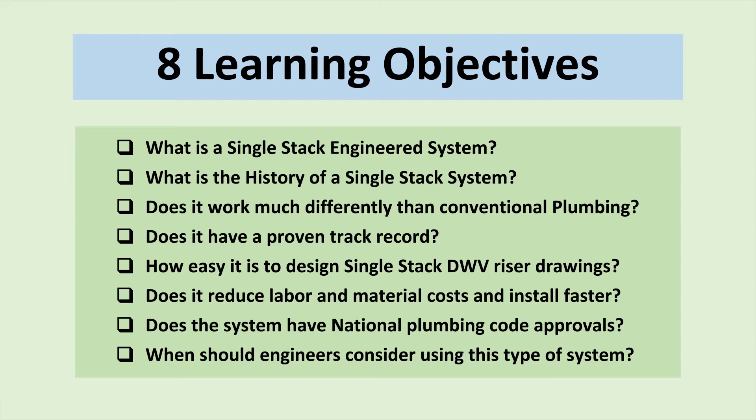What is a single-stack engineered system? The history of single-stack systems. Does it work much differently than conventional plumbing? Does it have a proven track record? How simple is it to design single-stack DWV riser drawings? Does it reduce labor and material costs and install faster? Does the system have National Plumbing Code approvals? When should engineers consider using this type of system? This is the most important thing for a plumbing engineer to consider after receiving the questions and answers found in this presentation: the plumbing engineer is the only professional according to the Plumbing Code that can design and stamp the approval of a single-stack system.

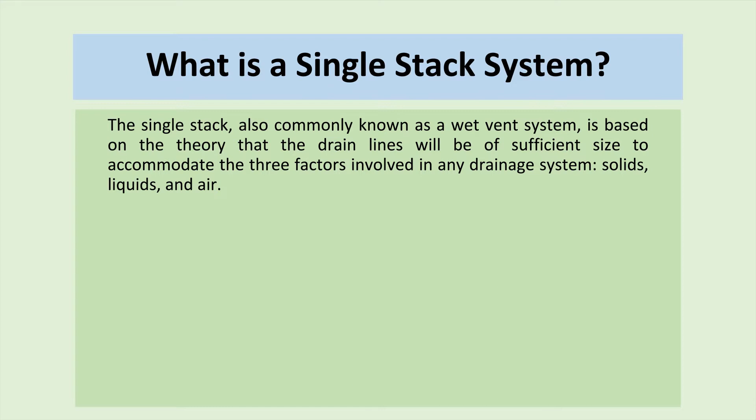What is a single-stack system? The single-stack, also commonly known as a wet vent system, is based on the theory that the drain lines will be of sufficient size to accommodate the 3 factors involved in any drainage system: solids, liquids, and air.

In the city of Philadelphia, a single-stack system was developed using these principles. The Philadelphia single-stack plumbing system does not require, nor does it depend on, any special type of drainage or vent fittings. However, there are branch line developed length limitations, and the size of the stack is often too large to fit in common plumbing walls.

The engineered single-stack system we will discuss today uses 2 fittings to control the velocity of water in the vertical stack and reduce the hydraulic jump when the piping changes from vertical to horizontal. There is also a single-stack system listed in the IPC code that uses long sweep or combo type fittings used in smaller multi-story buildings. Also, there is an approved combination waste and vent method shown in IPC section 912.

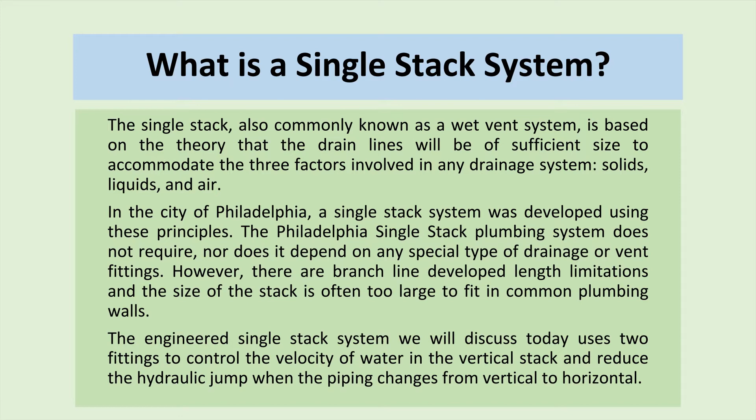The history of single-stack plumbing: the single-stack system is an engineered drainage and vent concept for multi-story buildings of any height. It involves 2 primary fittings, the aerator or stack vent and de-aerator or base vent, in conjunction with the normal approved standard DWV pipe and fitting materials.

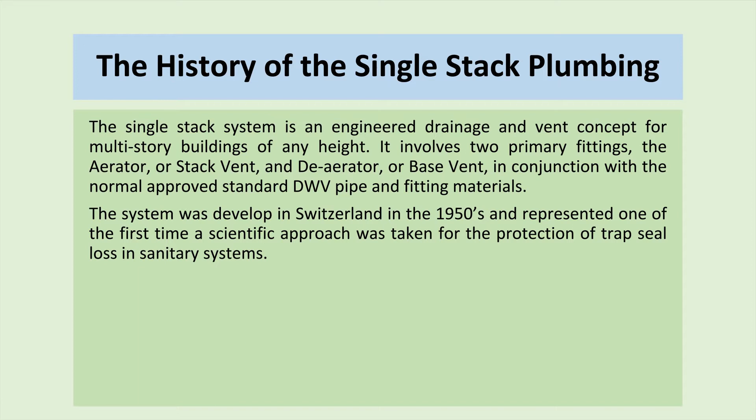The system was developed in Switzerland in the 1950s and represented one of the first times a scientific approach was taken for the protection of trap seal loss in sanitary systems. The hydraulic and pneumatic characteristics of intermittent flow were studied using a 10-story testing tower, complete with measuring instruments. It was found that controlled flow velocities reduced the excessive pressure excursions that can occur in conventional systems without revents.

The unique interior of these 2 engineered fittings provides the control and will maintain internal pressures acceptable without using any revents. These 2 special vent fittings are the most popular single-stack systems used in Europe, the United States, and Canada. They provide both venting of the wastewater flow for both the vertical stack and the horizontal drains.

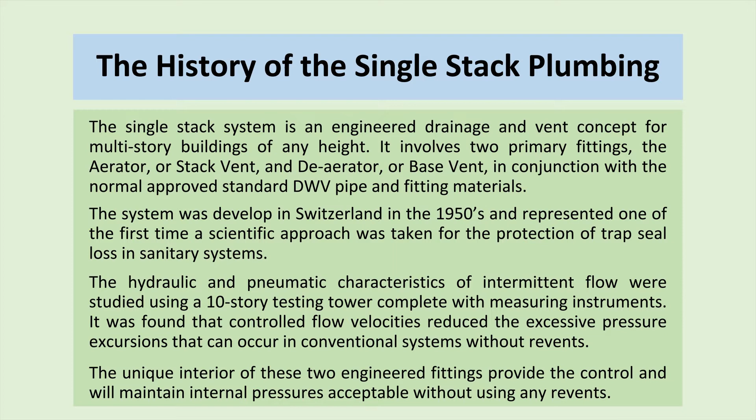Different single-stack systems installations. Single-stack technology was developed by Fritz Sommers in Switzerland in the 1950s.

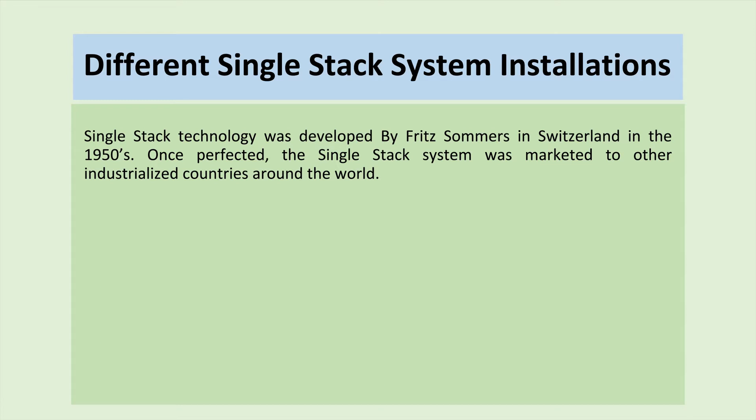Once perfected, the single-stack system was marketed to other industrialized countries around the world. Developed initially in cast iron, single-stack was introduced to the United States in the mid-1960s in the form of DWV copper. In the 1970s, a no-hub cast iron version was developed that offered standard no-hub band connections and became successful in hotels and high-rise apartment buildings.

In 2008, a single-stack fitting was developed using PVC materials, allowing use of the system for mid-rise residential, wood-constructed hotels, and high-rise towers, replacing both the heavy and expensive cast iron piping.

Europe and Asia started installing high-density polyethylene single-stack systems. Geberit is a Swiss company that uses similar type fittings, only made with polyethylene fittings and piping for projects in Europe and Asia, but they require electronic welded joints and the HD polyethylene material, and this is not approved to use in the United States.

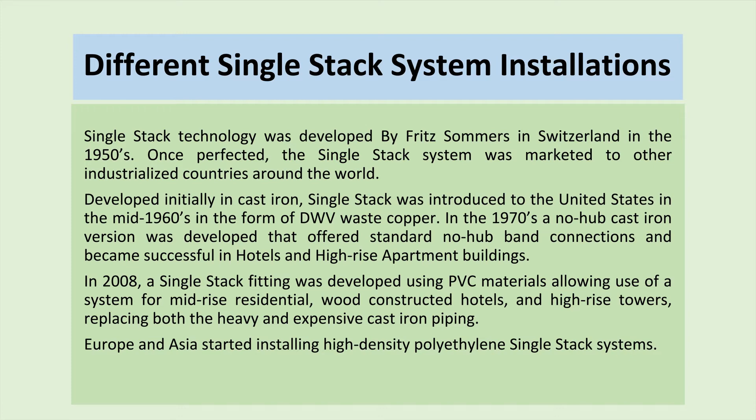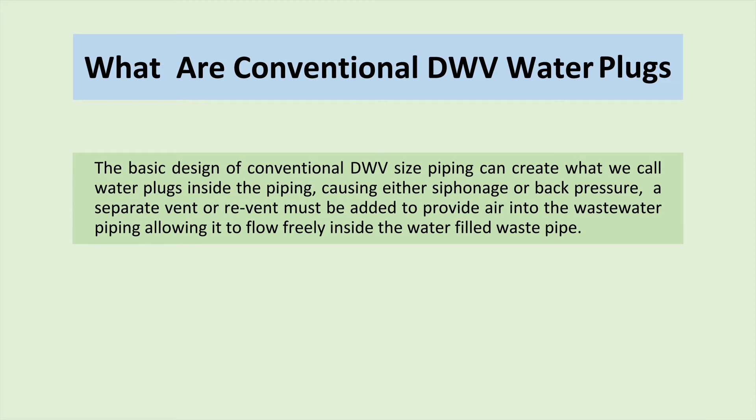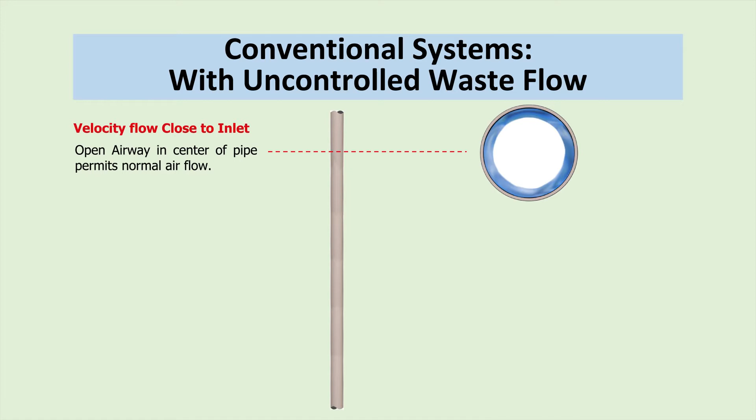Velocity increases with vertical drop. The increase in water flow velocity causes the thickness of water flow to build up. At terminal velocity, the air opening is completely closed, forming a water plug. This causes siphonage or back pressure unless the branches are separately revented.

These water plugs can form in conventional plumbing inside the horizontal DWV piping, but can be unplugged by installing an additional inline vent to provide air, allowing a full pipe to easily flow without affecting any trap seal losses.

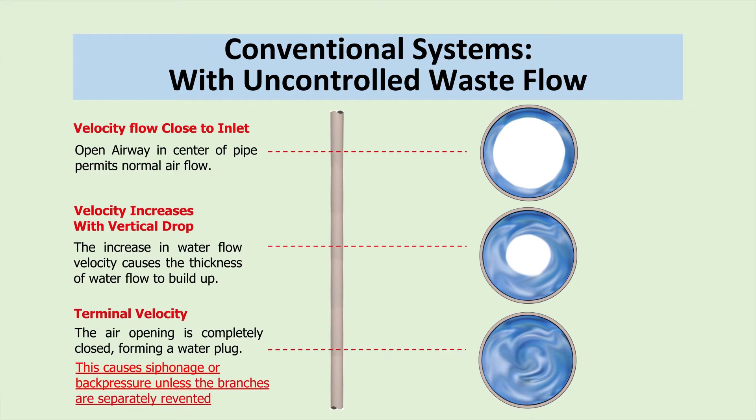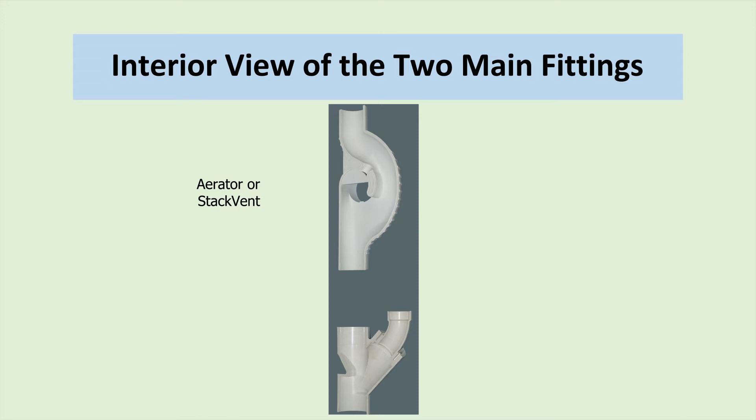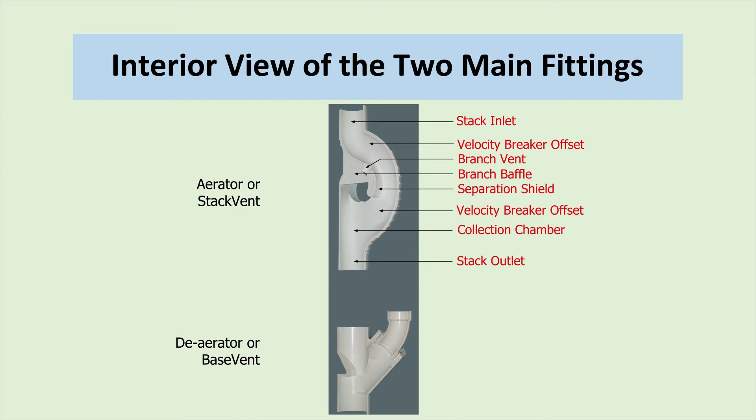Interior view of the two main fittings. The aerator or stack vent has a stack inlet, velocity breaker offset, branch vent, branch baffle, separation shield, velocity breaker offset, collection chamber, and stack outlet. On the de-aerator or base vent, there is an inlet, a relief vent that controls back pressure, a nose baffle that controls velocity, and an outlet.

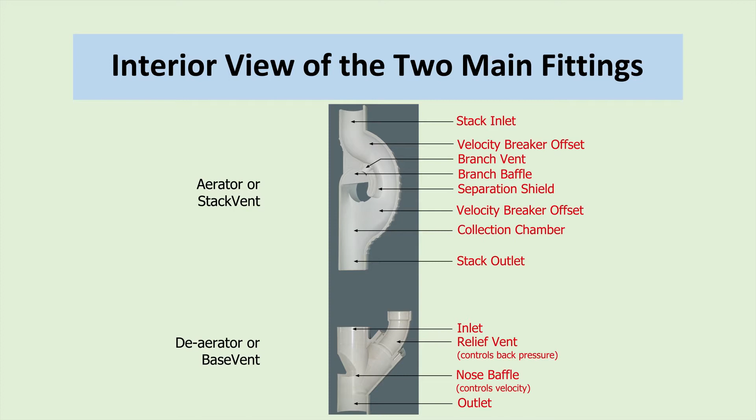These are the two special vent fittings used by ProVent PVC and Sovent cast iron. The engineer's design and pipe sizing allow the system to properly vent all the vertical and horizontal piping, and to control waste flow velocities.

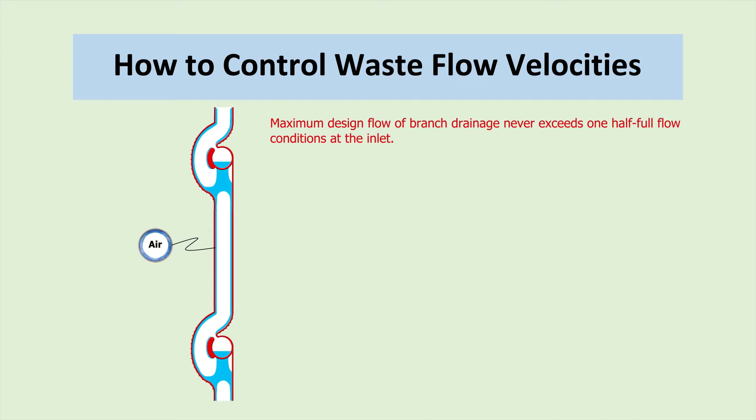Here's a stack with a stack fitting showing air in the middle. Maximum design flow of branch drainage never exceeds half full flow conditions at the inlet. The stack length never exceeds 20 feet without either a stack fitting or a velocity breaker using an inline offset fitting.

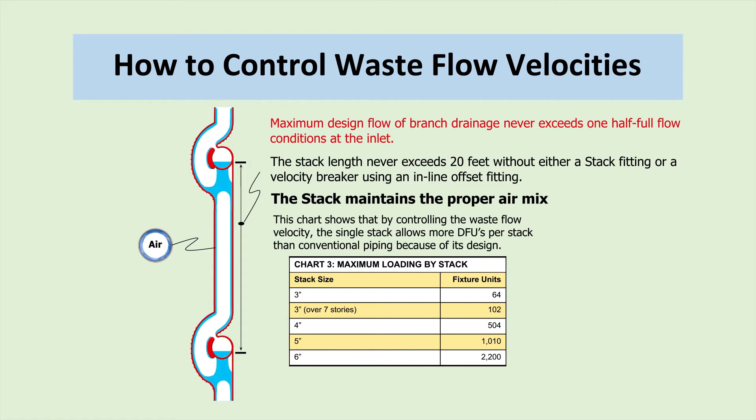The 4-inch allows 504 fixture units. The 5-inch is 1,010. A stack fitting is required at every floor when the connecting branch piping is 2.5 inches or larger in diameter.

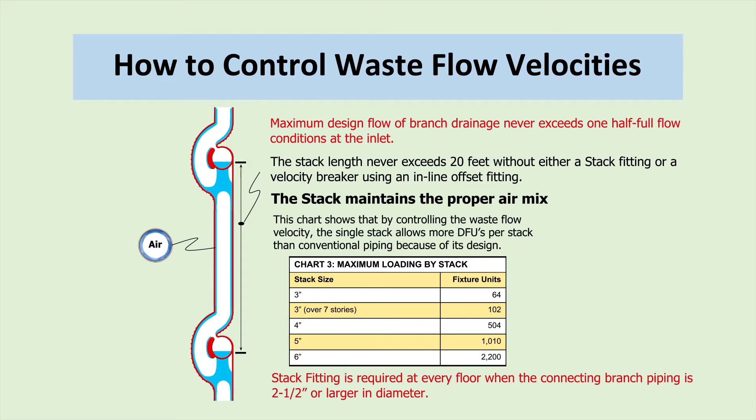IPC and UPC single stack DWV approved design.

IPC and UPC has an approved single stack system providing a similar type of combination waste and vent system which allows a single stack with many limitations. It allows just wastewater to flow through this straight stack. This approved system is still used now in many apartment buildings, but notice all the piping limitations.

It's a straight stack and cannot have any offsets and cannot discharge water closets, urinals, or disposals. There are no offsets permitted, and it has to be sized uniformly throughout its length.

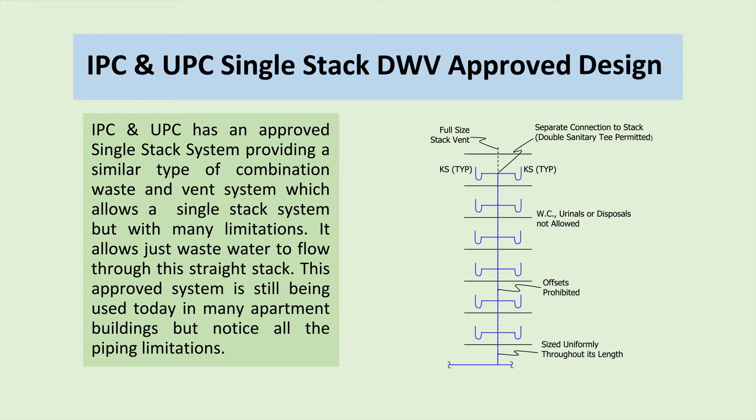This shows the IPC Section 912 Combo Drain and Vent System. This system permits waste-only fixtures to discharge into the IPC Combination Waste and Vent Stack System 912 without using revents, but has many restrictions. If the stack vent fitting was used, this system would have only a few restrictions.

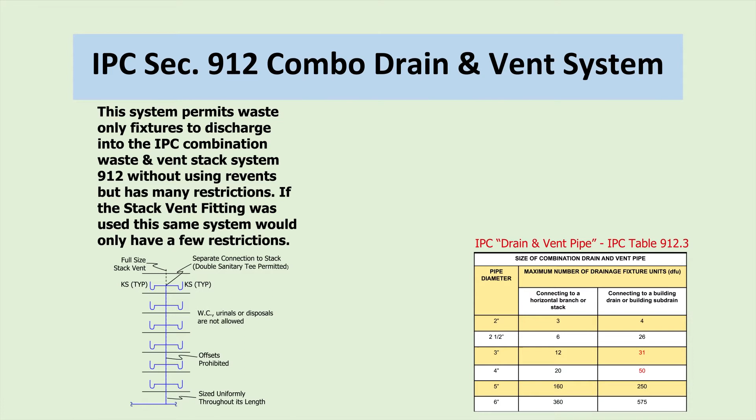The IPC Table 912.3 shows the 3-inch single stack connection limited to 12 fixture units, and the 4-inch stack is limited to 20 fixture units.

Compare this when using a stack vent fitting at each floor. Chart 3, loading by the stack, shows 64 fixture units for a 3-inch stack and 102 fixture units in apartment buildings over 7 stories, and 504 fixture units for a 4-inch stack and 2,200 fixture units for a 6-inch stack.

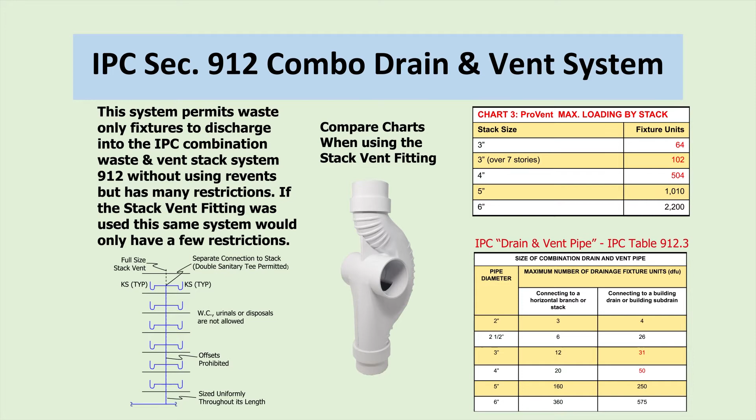As you can see, the approved IPC drain and vent system with limitations is basically the same design as the single stack system. The only difference is the single stack method adds a stack fitting at every floor and a base fitting where the vertical stack goes from vertical to horizontal with only fixture unit limitations.

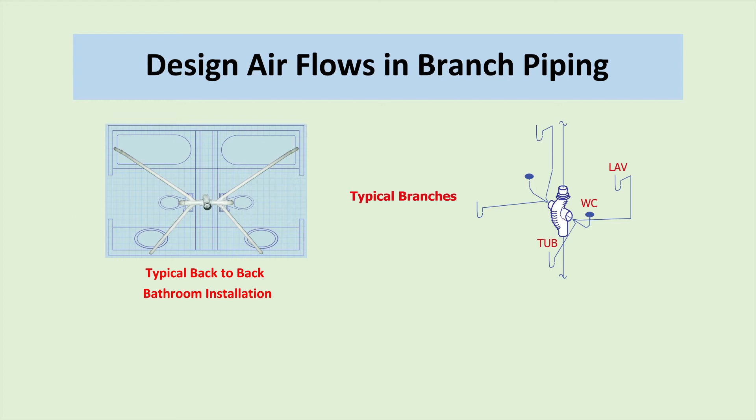The single stack uses only design airflows in branch piping. Here, we are showing a typical back-to-back installation. Typical branches are coming from the stack fitting to 2 water closets, 2 tubs, and 2 lavatories.

The single stack design flow is less than 50% of capacity. Single stack allows the waste to be vented through the top of the branch piping.

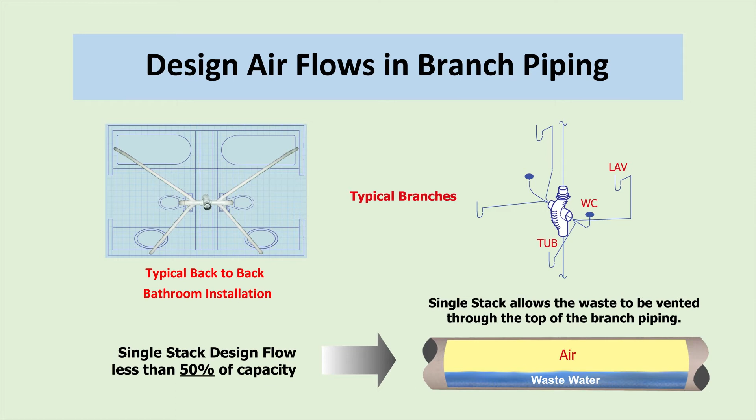The ProVent design can also be compared to the IPC and UPC code-approved circuit venting that allows the air on top of horizontal pipe, shown here, to be used as a vent for branch connections. IPC and UPC allows for circuit venting.

Circuit venting allows up to 8 floor outlet fixtures with a single vent. The basic IPC principle behind a circuit venting system is the horizontal flow of the drainage never exceeds half-flow water conditions inside the pipe.

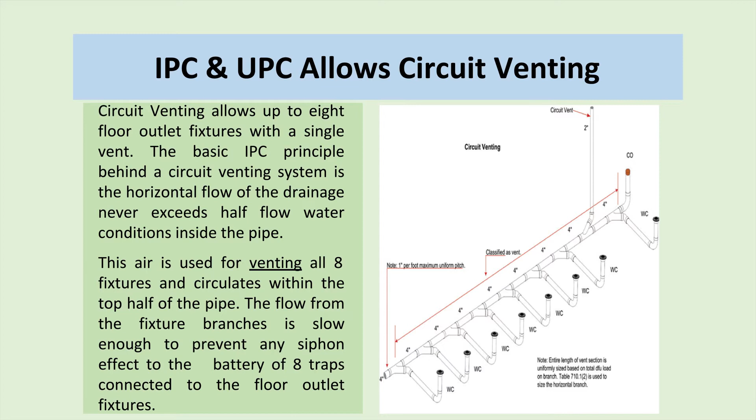This approved IPC Section 7.101 and UPC Section 911.1 circuit venting also justifies the same single stack method of venting the branch connections. This shows multiple branches into one branch opening.

The single-stack system functions on the same principle by using the air circulating inside the top of the horizontal branches to allow a combination of horizontal drains to drain into one single branch, as long as the one 3-inch branch doesn't go over 13 DFUs.

IPC Table 710.1(2) shows 20 DFUs can discharge into one vented branch opening. Both methods will drain the same way, only the single stack can drain more than one branch, but not more than 13 DFUs.

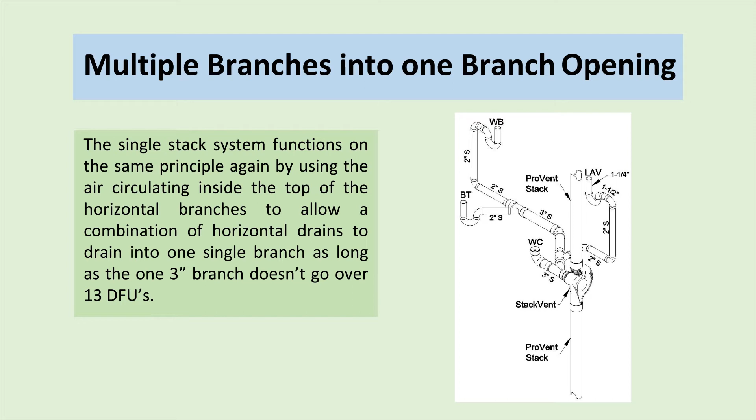The single stack base and PRL fitting. Because of the hydraulic jump at the base of every stack, the pressure relief line shall not be tied into the horizontal drain any closer to the stack than 10 times the drain diameter.

This is measured from the center line of the stack to the center line of the PRL wye connection. Tying the PRL into a 4-inch drain would require at least 40 inches from the center line to the stack. The de-aerator or base vent fitting will reduce the hydraulic jump, providing a smooth flow into the main drain.

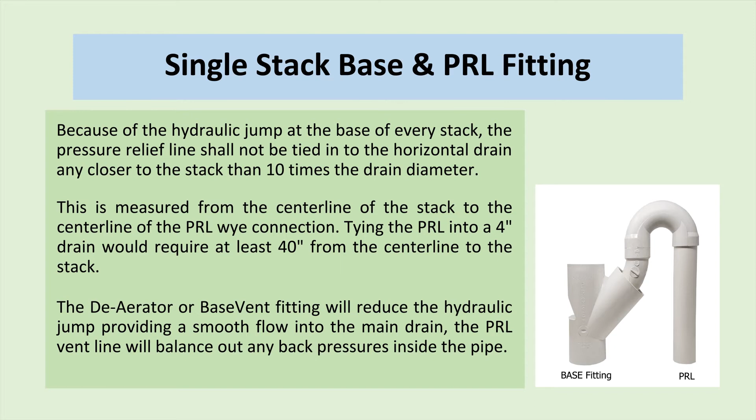The PRL vent line will balance out any back pressures inside the pipe. This same base or de-aerator fitting is also used for venting when stack offsets are needed when bathrooms are moved to a different area from the floor below. The base fitting controls the flow and hydraulic jump.

This detail shows how and where the PRL vent line gets tied in above the elevation of the main drain, compensating for any negative or positive pressures inside the drain. The nose baffle compensates for back pressure and lowers the hydraulic jump. The stack and the vent are in the same wall.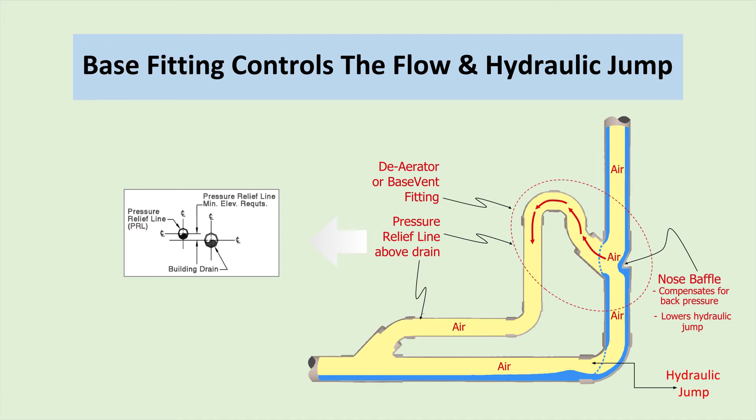Connecting the horizontal branch drains. Branch waste lines must enter above the center line within the 10 times stack diameter. Branch waste lines connect anywhere upstream from the PRL line and connect with the branches rolled up as shown here.

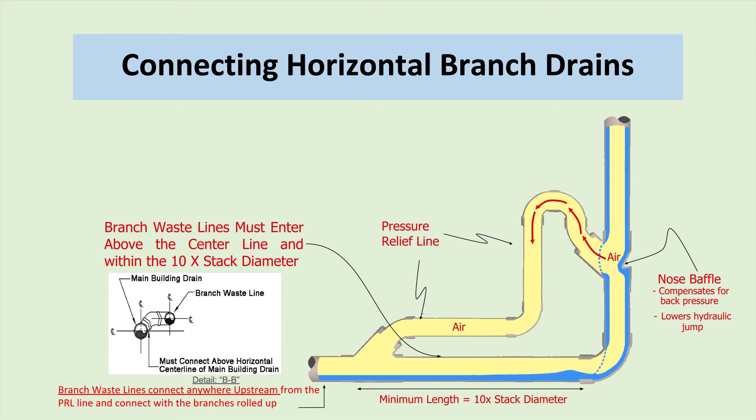The base fitting using roll-up branches. Here, we are using the branch drains rolled up when discharging into the main drain. See the branch detail showing the wastewater in the branch discharging into the open airspace on top of the main drain, producing a smooth flow. The detail on the right can be used in the underground or in the collection area above the ground floor.

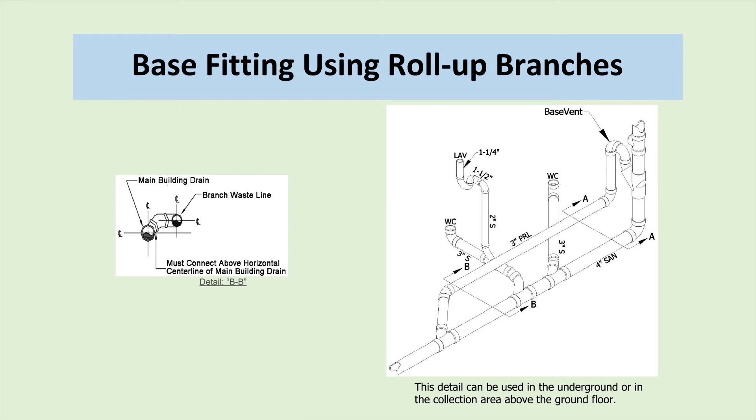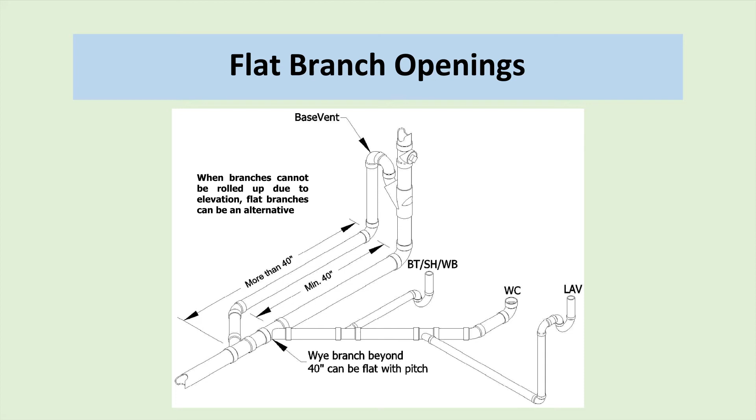Flat branch openings. When branches cannot be rolled up due to elevation, flat branches can be an alternative. However, they can only be tied in 40 inches beyond the stack itself and can be laid flat, but with pitch to the 3 branches shown here.

Stack offset piping connections. When offsets occur on the upper floors, the PRL vent line must connect into the vertical stack and not into the horizontal piping. If the stack offset can be made with a minimum 60-degree fitting or less, they are not considered an offset, but considered a straight stack, which is shown here on the right.

On the left, it shows the tying in of the PRL line on the vertical stack as opposed to the horizontal. The branch lines still have to be rolled up as shown here.

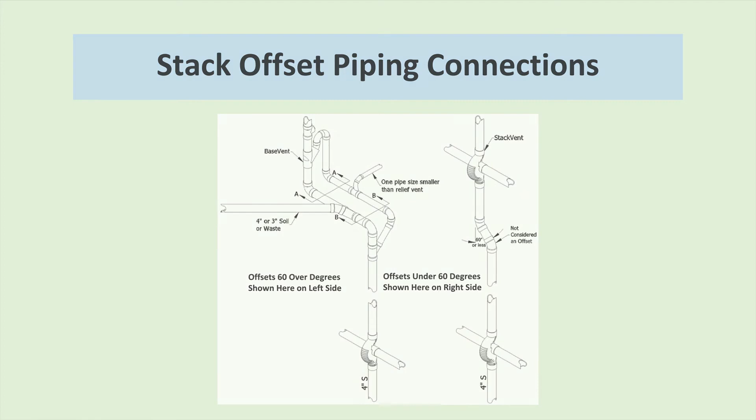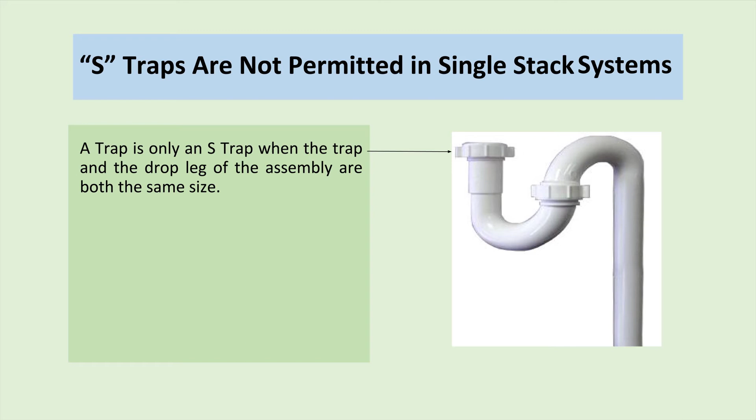When most people see lavs and sink connections, they say, 'Hey, that's an S-trap.' S-traps are not permitted in modern plumbing codes. They used to be permitted years ago, but have since been outlawed. S-traps are not permitted in single-stack systems. A trap is only an S-trap when the trap and the drop leg of the assembly are both the same size. The drop leg fills up with water, causing a water plug that can siphon the water seal in the trap. Single stack designs do not allow this type of siphonage S-trap.

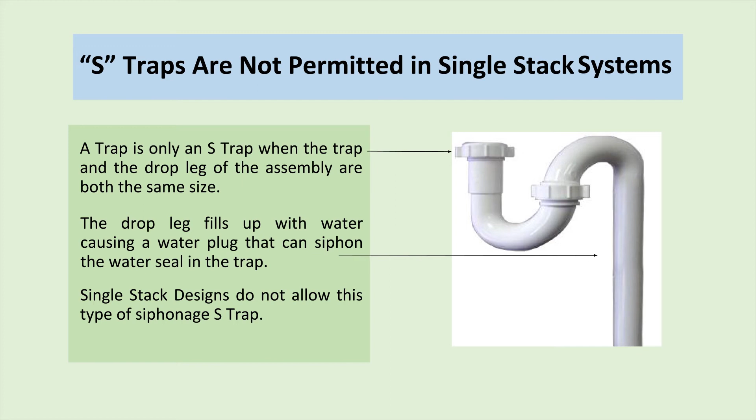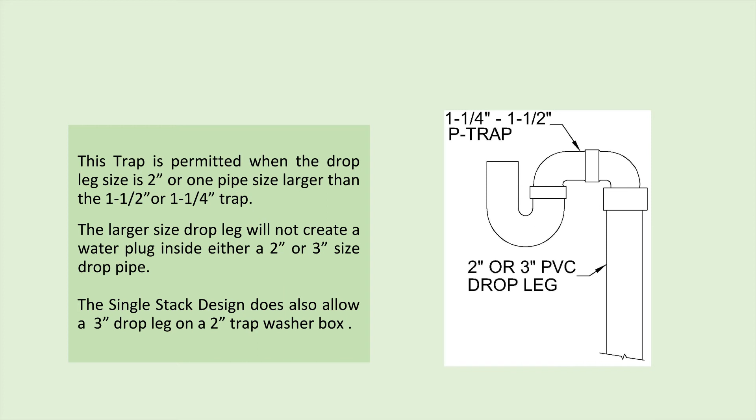This trap is permitted when the drop leg size is 2-inch or 1 pipe size larger than the 1.5 or 1.25 trap. The larger size drop leg will not create a water plug inside either a 2-inch or 3-inch size drop pipe. The single stack design does also allow a 3-inch drop leg on a 2-inch trap for a washer box. This will prevent any siphonage by oversizing the drop leg by 1 or 2 pipe sizes. Special designed single stack P-traps are permitted.

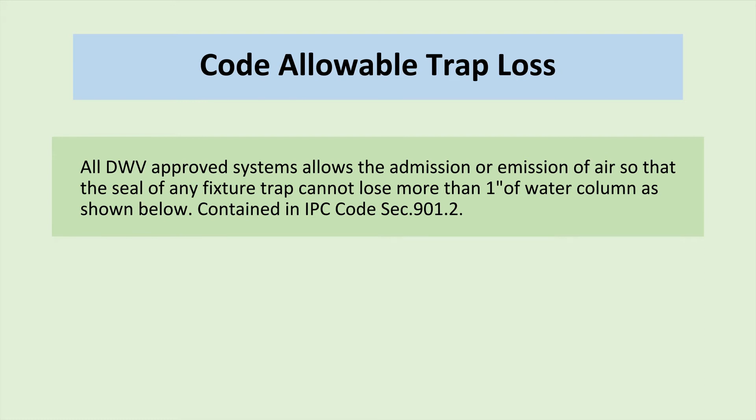Code allowable trap loss. All DWV approved systems allow the admission or emission of air so that the seal of any fixture trap cannot lose more than 1 inch of water column as shown. This is also contained as a requirement in IPC Code Section 901.2.

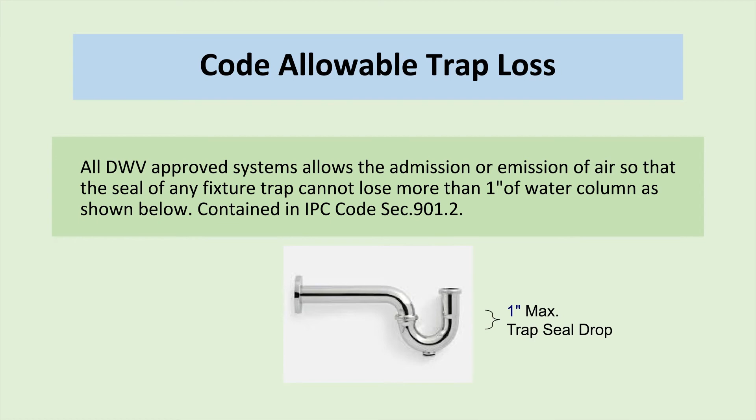This shows the area of trap seal loss in a typical trap. The single stack system has been tested using 1 pipe size larger in the 10-floor testing facility and passed the 1-inch maximum trap seal drop test.

Plastic DWV risers need expansion joints. PVC stacks require expansion and contraction joints on the PVC risers. The above expansion joints are flexible coupling type fittings expressly used for PVC DWV stacks in multi-story buildings at every floor or every other floor in accordance with the structural engineer's instruction charts, and can be installed without access panels.

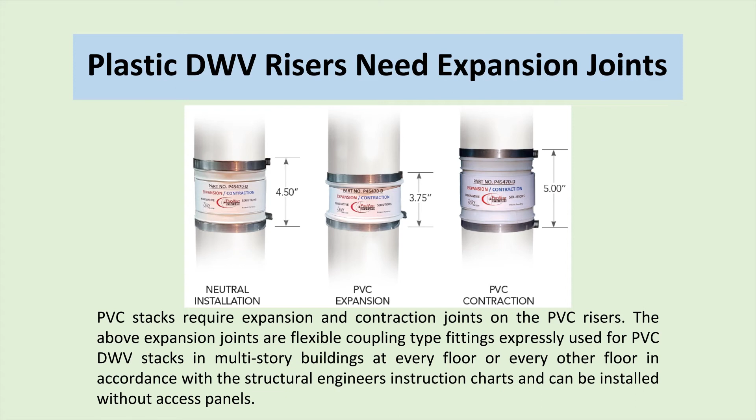If the DWV single stack system uses PVC or ABS piping, it must use the proper type expansion and contraction joints in accordance with both the plumbing and building codes.

Location of EZ Flex expansion couplings. This photo shows the proper location of the expansion joint because it not only works for expansion and contraction, but also works for ease of installing the stack fitting in between floors, and shows a pipe guide located below the expansion coupling.

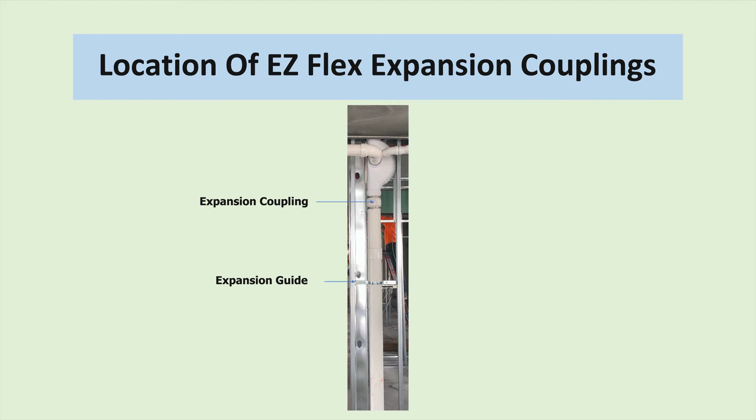Conventional vents can connect to single stack vents. Many hotels and apartments now have commercial space on the first or second floor. This illustration shows how to connect any vents coming from conventional plumbing in other areas and can tie into the single stack, usually connecting on the floor above with the vent connection looking up on a 45 as shown. Conventional plumbing from another area connected to single stack plumbing shown here on a 45-degree angle.

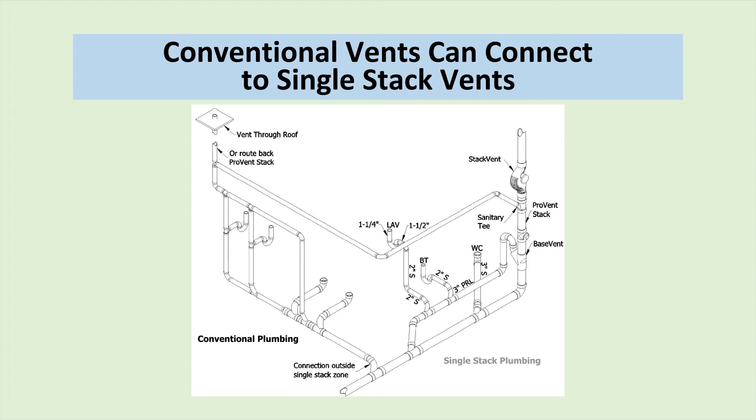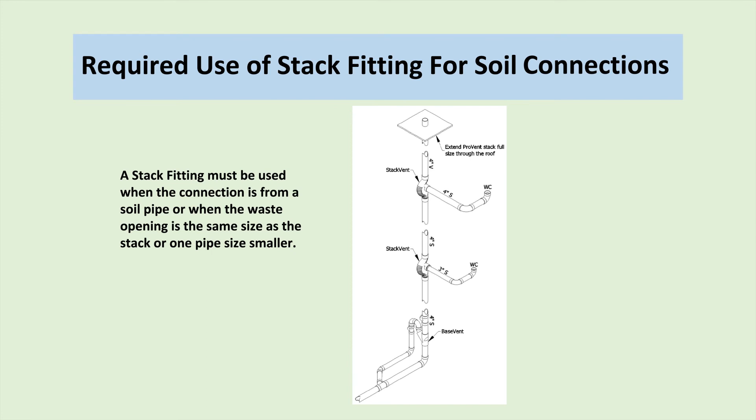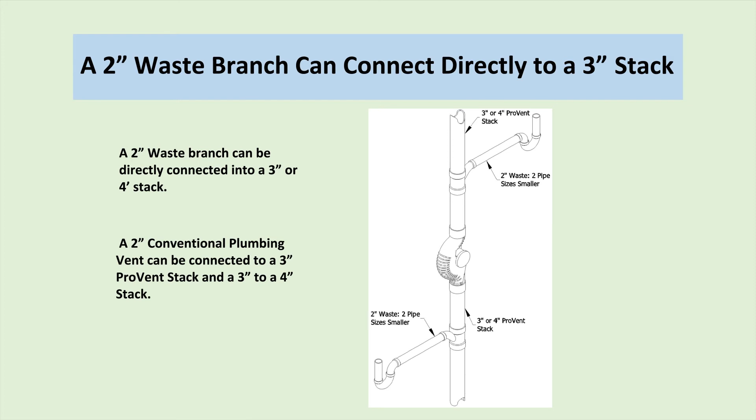Required use of a stack fitting for soil connections. A stack fitting must be used when the connection is from a soil pipe, or when the waste opening is the same size as the stack or one pipe size smaller. This is in accordance with the engineer's design manual. A 2-inch waste branch can be directly connected to a 3 or 4-inch stack. A 2-inch conventional plumbing vent can be connected to a 3-inch ProVent stack and a 3 to 4-inch stack.

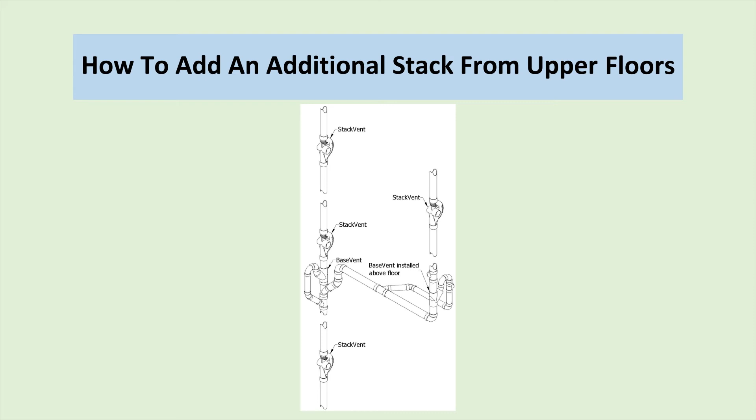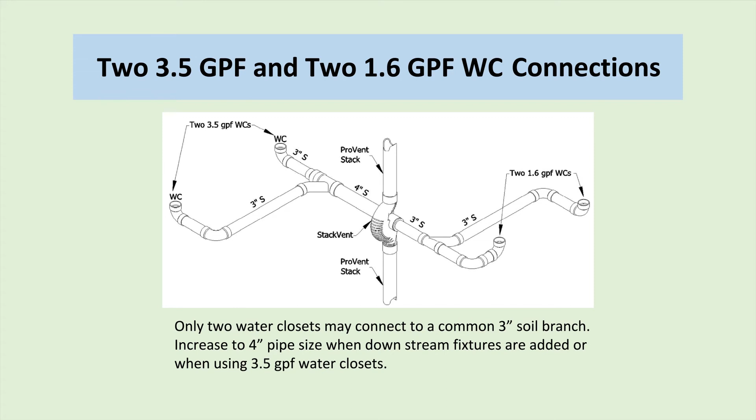3.5 gallons per flush and 1.6 gallons per flush water closet connections. Only 2 water closets may connect to a common 3-inch soil branch. Increase to 4-inch pipe size when downstream fixtures are added or when using 3.5 gallons per flush water closets. The type of toilets used can change with the size of the piping used.

Connecting back-to-back pressurized water closets. These illustrations show how to install pressurized back-to-back water closets to prevent them from blowing the pressure back through to the other side of a sanitary cross-fitting. The IPC Section 706.3 requirement is to use a double TY type fitting or have a 36-inch center-to-center developed length between the 2 closets. This rule would apply to conventional plumbing or single-stack plumbing.

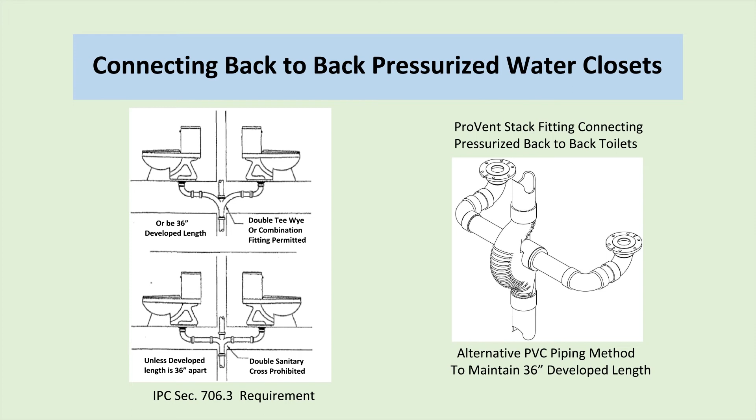The drawing shown on the right-hand side shows how to develop the 36-inch developed length using the ProVent method.

Approved branch length openings. This chart shows the horizontal branch lengths of 4, 3, and 2-inch pipe can run, excluding any vertical piping. Telescoping pipe sizes is permitted.

Telescoping larger piping with smaller piping is permitted to increase the length of the branch piping. If a 2-inch branch needs to be 18 feet, a 3-foot piece of 3-inch pipe can be added downstream from the 2-inch to allow the 2-inch 15-foot branch to become an 18-foot branch. 4-inch can also be added to a 3-inch to extend its length.

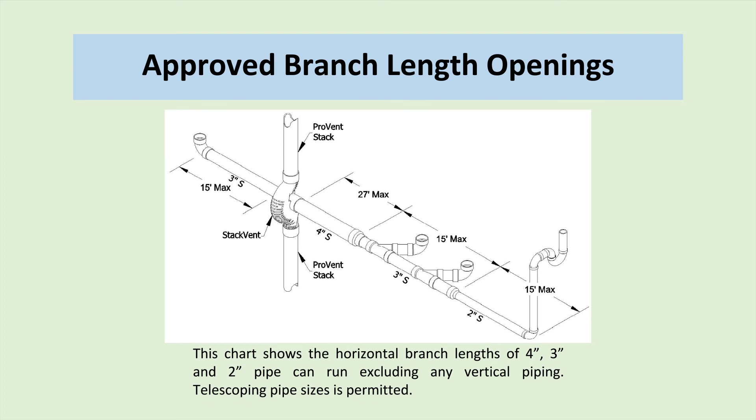Lav or electric water cooler details and washer branch piping. Here we see the details of lavs, sinks, and washer box connections. If a fixture is connected downstream from the washer, it must increase one pipe size as shown in the middle image. ProVent recommends 2 drops on back-to-back greasy waste kitchen lines because it serves different tenants, see left drawing. Lavs can have back-to-back lavs with 1 drop, see upper right drawing.

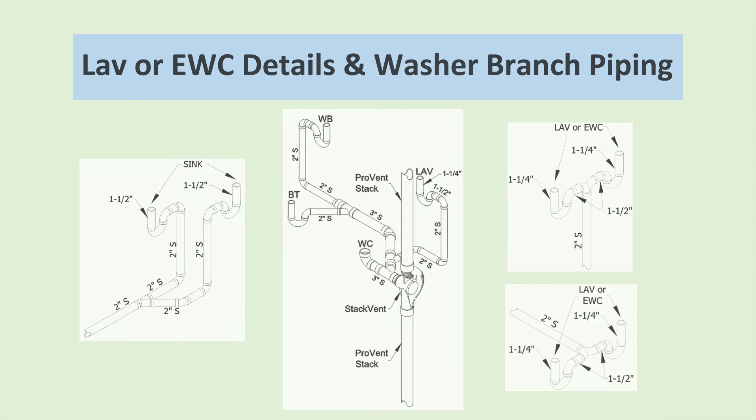Vertical pipe rules: drop lengths can become a problem when the drop goes from vertical to horizontal, creating a hydraulic jump. The drop may be longer when having a smoother flow to the horizontal drain, as shown with 2-45s, or use a Y and 1/8 bend shown in numbers 3 and 5, or increase the size of the horizontal drain as in number 4.

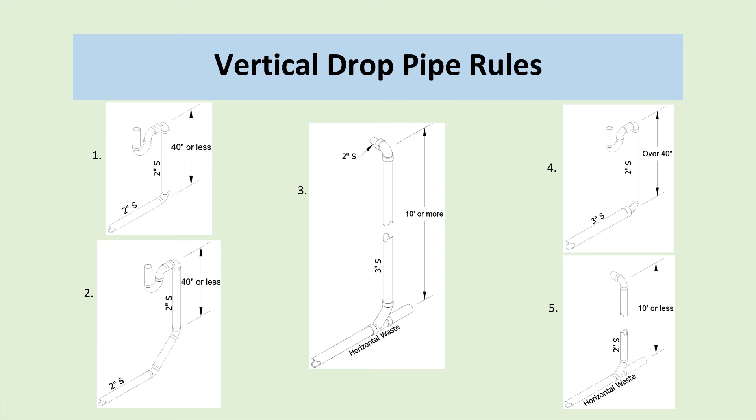Recap of what we've learned so far: S-traps are not permitted by plumbing codes. However, the ProVent P-trap has a different configuration with a larger drop leg that connects to the U-bend trap and prevents water plugs from forming, and is accepted by the IPC and UPC. A 2-inch size waste, or 2 pipe sizes smaller than the stack, can tie into a stack fitting or aerator fitting. We learned pipe length rules, vertical drop pipe rules, and water closet connections.

Market Square Apartments project in Indianapolis, Indiana. The first 4 floors of this project were for car parking only, with apartments starting on the 5th floor. For this ProVent apartment project, the first 4 floors were parking decks without any plumbing. This is where inline offsets could be used, or the stack pipe could be increased by 1 pipe size, with no branch connections needed on floors below.

The left side of this slide shows double inline offsets every 20 feet, which can be used instead of a stack fitting. Usually, when there is no plumbing, it's because of parking decks on lower floors or various floors that have no plumbing. Also, the stack could be increased 1 pipe size from the lower level to the collection area as an alternate.

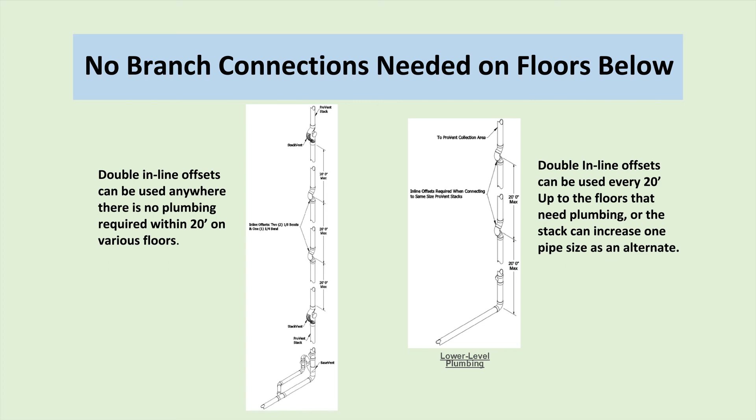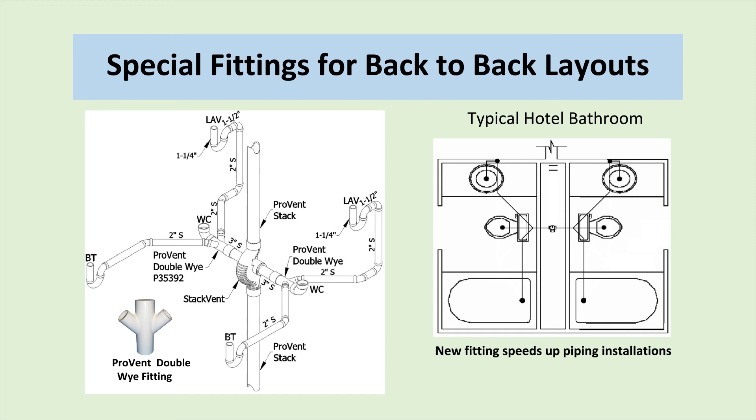When should single stack design be considered? Single stack systems are not practical to use for most buildings. They're used mainly for multi-story apartment type units with bathrooms, kitchens, and laundry rooms above each other on every floor. Single stack DWV design should also be considered in any multi-story building with at least 3 or 4 floors. There is no reason not to consider it.

Savings will vary from layout to layout. Sample ProVent drawings are available to compare between single stack and conventional plumbing.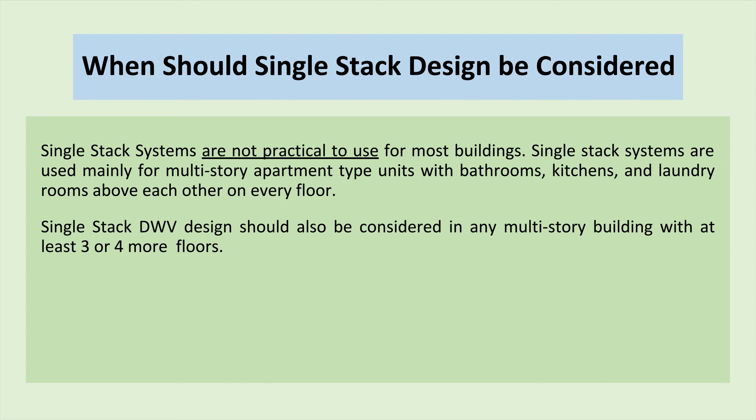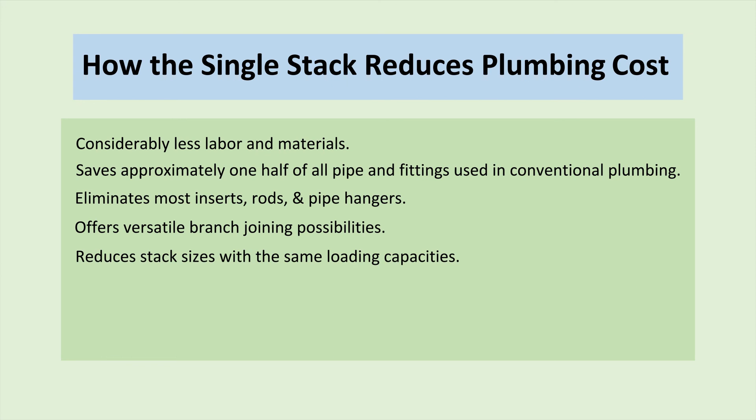How the single stack reduces plumbing costs: considerably less labor and materials, saving approximately half of all pipe and fittings used in conventional plumbing. It eliminates most inserts, rods, and pipe hangers, offers versatile branch joining possibilities, reduces stack sizes while maintaining the same loading capacities, and saves more space while completing the DWV system faster.

It offers easier design layouts for piping and DWV stacks, with consistent layout designs from project areas where the rules never change. Consider each of these items that show the reduced cost over conventional plumbing. The next 3 slides list many more benefits.

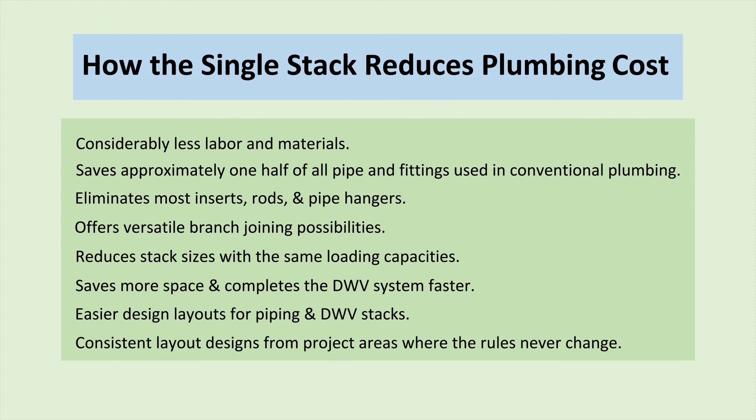More cost reasons to use the system. Item number 1: most project schedules are now fast track, and single stack allows plumbing contractors to stay ahead of these schedules. Item number 2: less pipes equals less penetrations and fire stopping. Item number 3: less pipes equals more space for coordination with other trades. Item number 1 was the most important surveyed item noted by both general contractors and the owner.

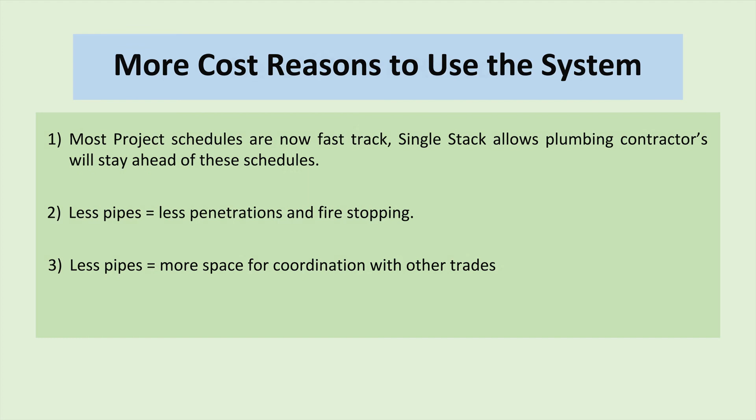More reasons: it can be used to help save owners' budgets, and promotes engineering firms as being innovative and proactive in saving both time and clients' budget. It offers easier plan reviews with code officials and inspectors, and works even better with modular construction both off-site and on-site. Conventional DWV systems can connect to single-stack vents from lower levels in most projects. Modular construction is using single-stack plumbing more each day.

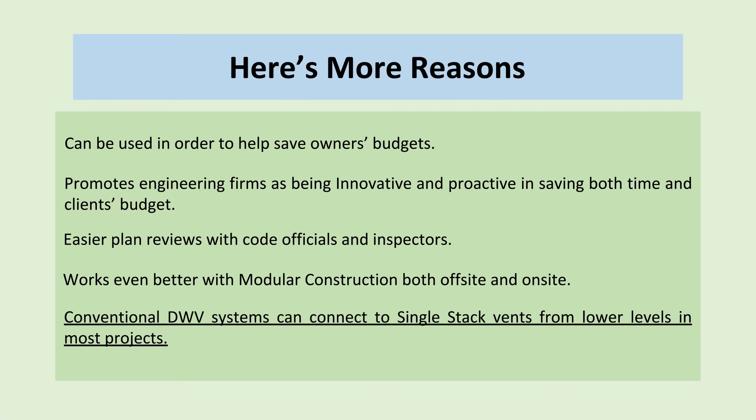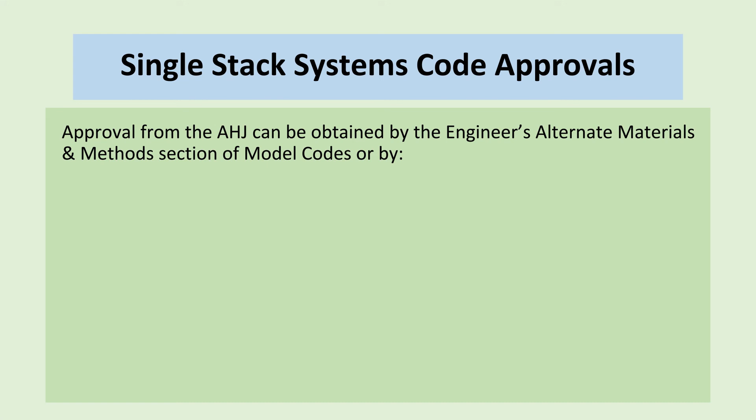Single-stack systems code approvals: approval from the AHJ can be obtained by the engineer's Alternate Materials and Methods section of Model Codes, by the IPC Codes Section 316 and 701-B. Alternate Engineer Design: the design, documentation, inspection, testing, and approval of an alternate engineer design plumbing system shall comply with sections 316.1.1 through 316.1.6.

The UPC Code, Section 301.4, Appendix C, Alternative Engineer Design: an alternative engineer design shall conform to the intent of this code and shall provide an equivalent level of quality, strength, effectiveness, fire resistance, durability, and safety. All single-stack manufacturers are willing to assist in gaining plumbing approvals in any questionable local code areas.